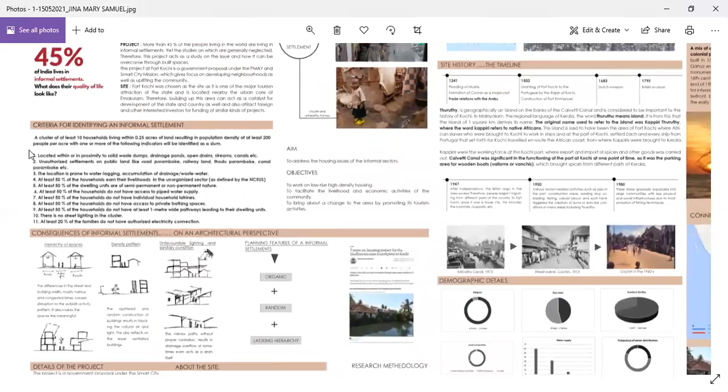The criteria for selecting informal settlements are as listed below. The consequences of informal settlements from an architectural perspective are the lack of hierarchy of spaces, the congested density pattern, and the unfavorable lighting and sanitary conditions.

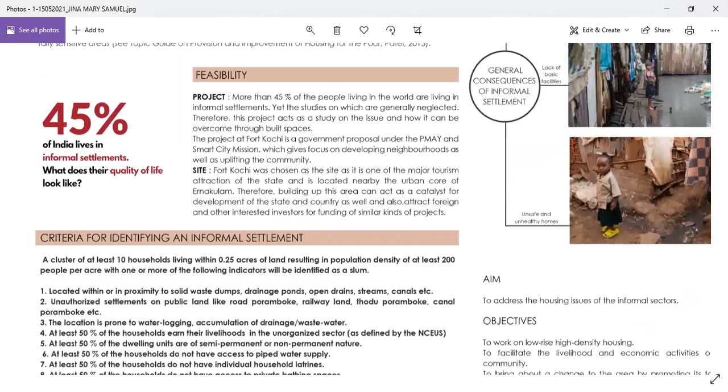So why this project? I chose this project because more than 45% of the people living in the world are based on informal settlements. Therefore, this project acts as a study on the issue and how it can be tackled or overcome through built spaces.

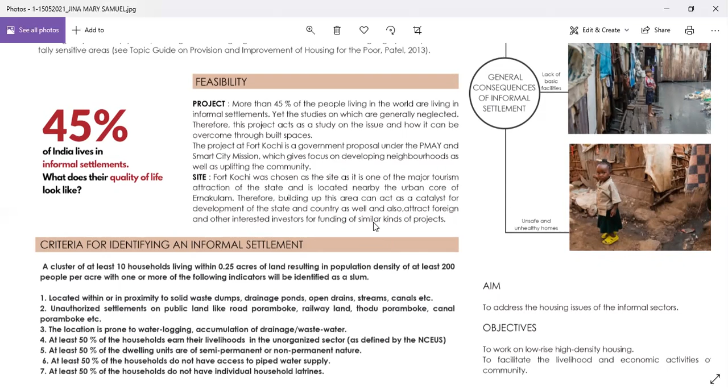The site is Thuruthy, located at Fort Kochi. This site was chosen because it is one of the major tourism attractions of the state and country, and is located near the urban core of Ernakulam. Therefore, building up this area can act as a catalyst for development of the state and country, and also attract foreign and other civil investors interested in funding similar kinds of projects in the near future.

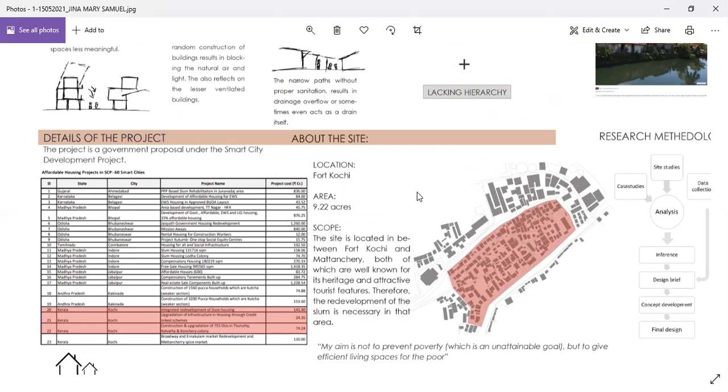This project is a government proposal under the Smart City Mission and PMAY. It has an area of 9.22 acres, and the history of the site dates back to 1341 AD.

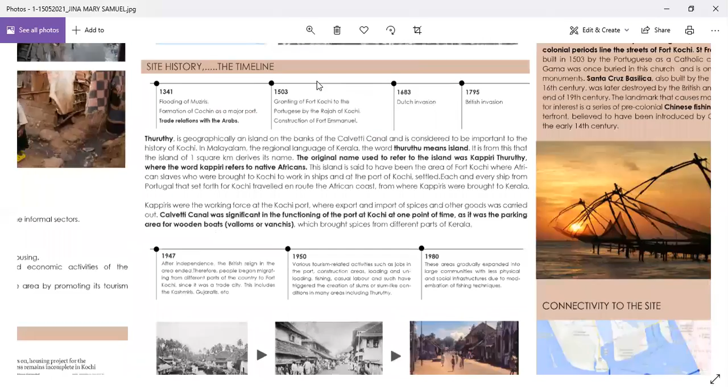The connectivity of the site is such that it can be accessed through roadways and waterways. The demographic details of the site were deducted from the site survey, questionnaires, interviews, and physical documentation conducted at the site from January till late February.

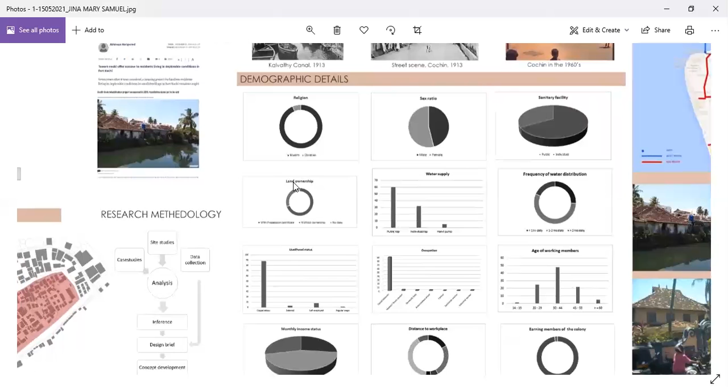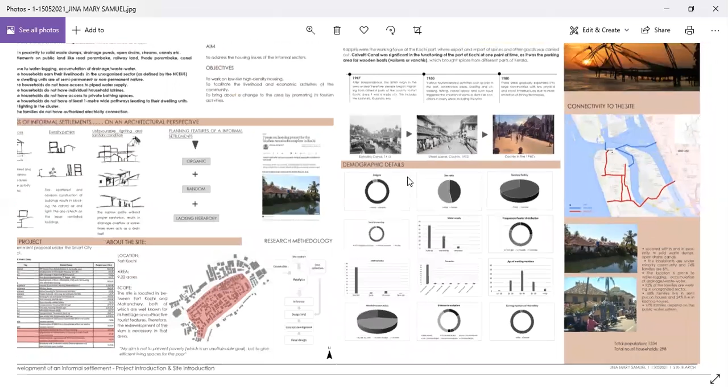From what I have studied and analyzed, most of the people belong to the Muslim community, and they work in the unorganized sector or as casual laborers. The sanitary condition in the area is very poor, and it has an equal ratio of males and females. The total population of the area is 1,300, and the total number of households is 298.

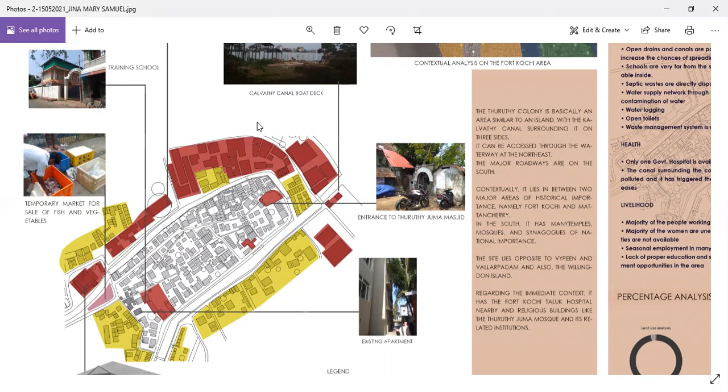When it comes to the context, the site is surrounded at the entrance by a community hall and an existing temporary market, and also a higher secondary school. Then there's a boating area, and within the site at the north there's a mosque known as Thuruthy Juma Masjid, and a training school at the east for 11th and 12th standard students, which functions very little. There is also an existing apartment built by a social group.

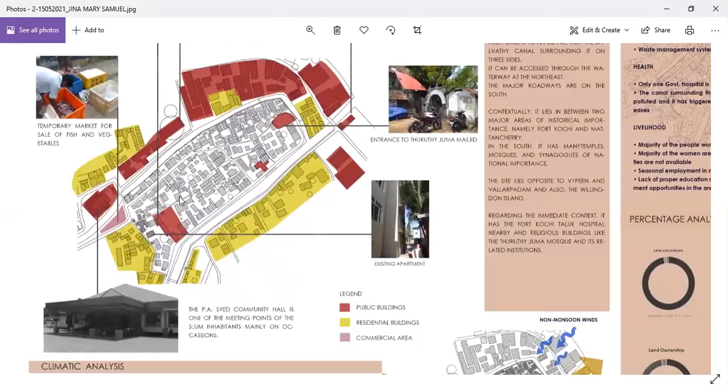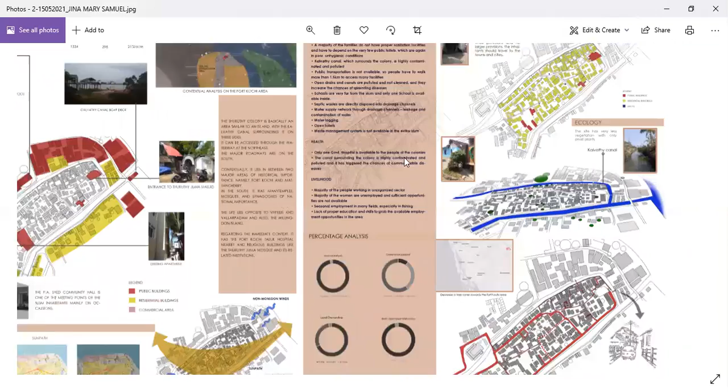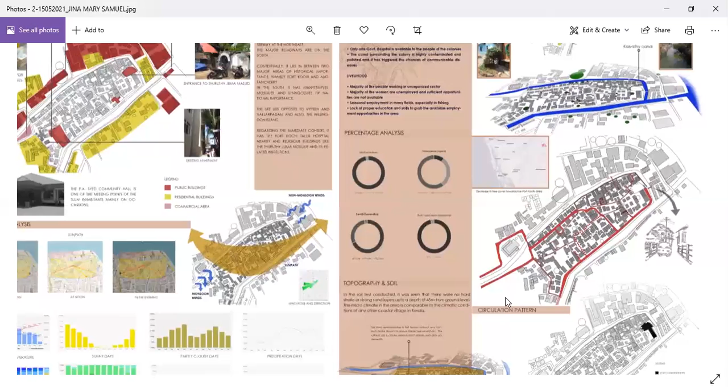The weather of the area is very hot with strong winds. The various mappings that I have deducted from the studies are as these. The ecology of the area shows very less vegetation, and the circulation is also very poor with lesser access ways to individual houses. The topography of the land is flat.

Also, the roofing types and the lighting and ventilation are poor, and the roofing is mainly tile roofs, which recently changed to flat roofs.

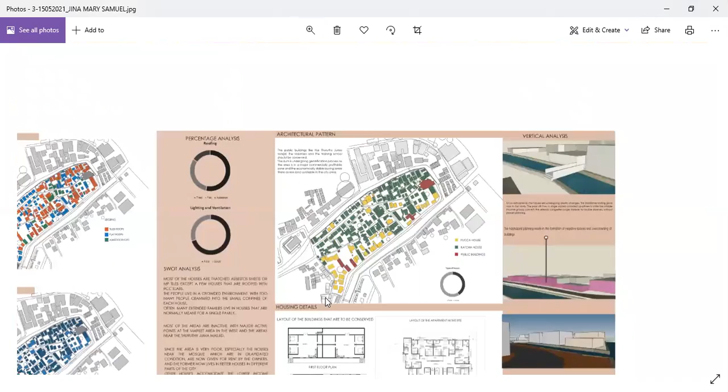At the entrance there is more activity, and further away from the entrance it is a very silent place. Also, the housing in these areas, most of them are kacha houses, and the structure has efflorescence due to the salinity of the water, since it is located in the backwaters and near the Arabian Sea.

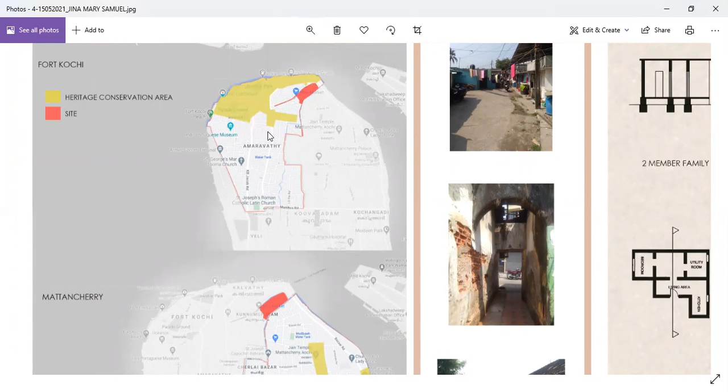Also, the site is sandwiched between two heritage conservation areas, one at Fort Kochi and the other at the Mattancherry area.

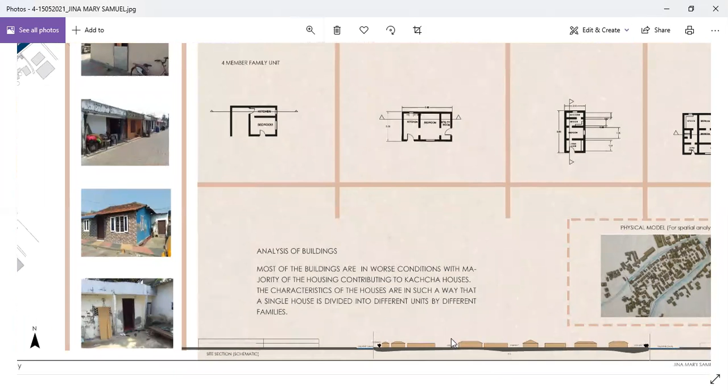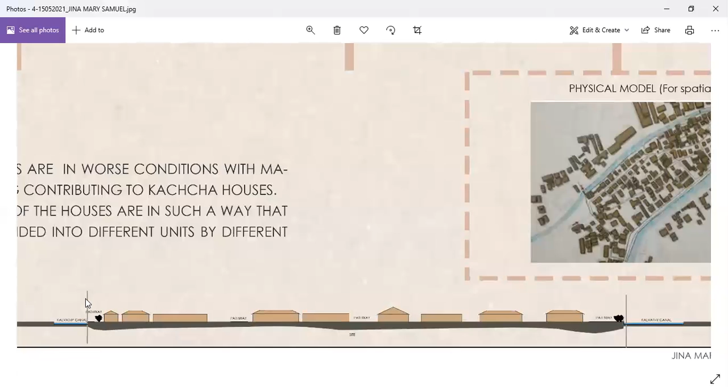Also, the houses basically have a rectangular or square layout with basic utilities like living area and kitchen, and some of them don't even have a toilet, having to walk almost 1 to 2 kilometers to access them. Most of the buildings are divided and used by different families — a single house is divided among different families and used. The site is surrounded on either side and at the north by the Kalvathy Canal.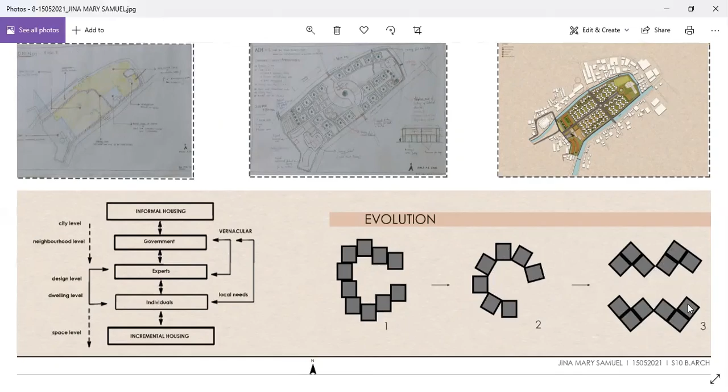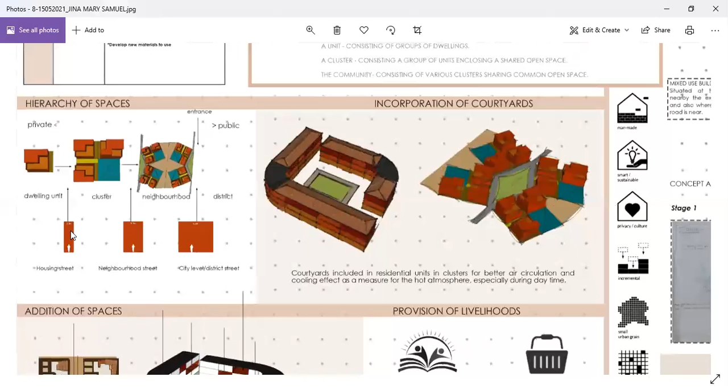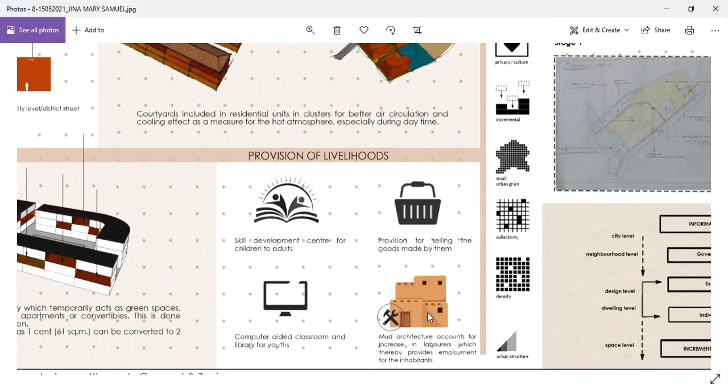There was incorporation of courtyards for cooling effect and the addition of spaces which can also be converted. The provision of livelihoods includes a skill development center, a computer-aided classroom, and mud architecture for labor, along with provision for selling goods made by them in the sieving and food processing unit.

This is the master plan. At the entrance from the bridge, there's a parking area, and nearby is apartment number 1. Further east is apartment number 2. At the entrance itself is a small commercial or mixed-use building, and there is the primary school.

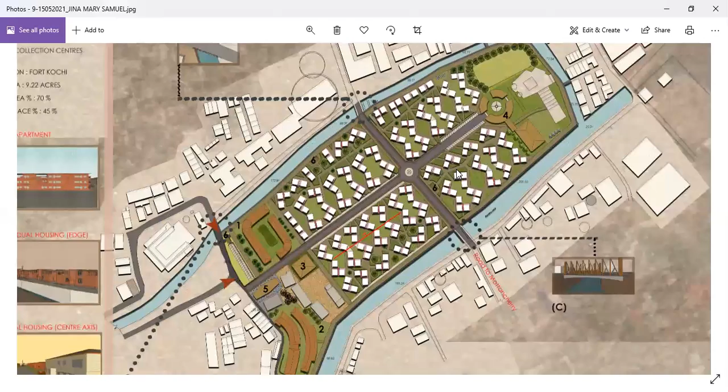The individual housing units were provided with adequate open spaces at the center, and a community center was provided within the major axis without hindering the view of the mosque.

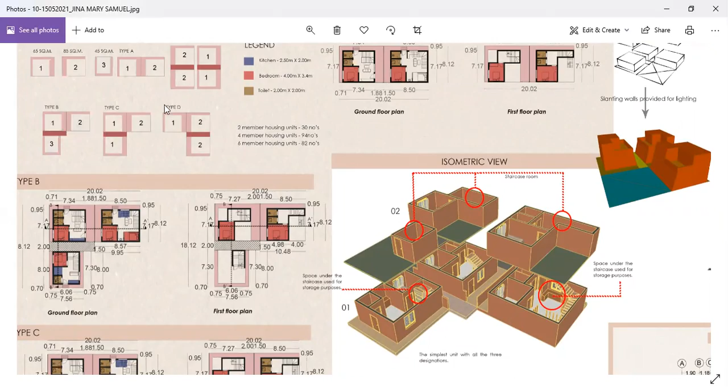The individual units are clustered with designations 1, 2, and 3: 1 for 65 square meters for a 4-member family, 2 for a 6-member family, and 3 for a 2-member family. These were shaped into groups of 3 and placed according to the site and context. For waste management, a septic tank was provided for 150 people in each cluster.

The necessary materials were also added to the buildings.

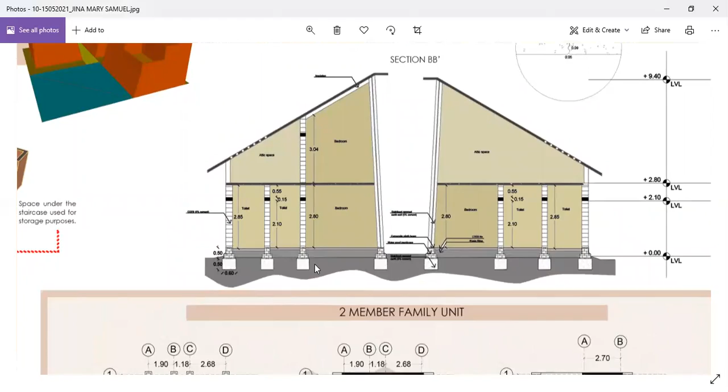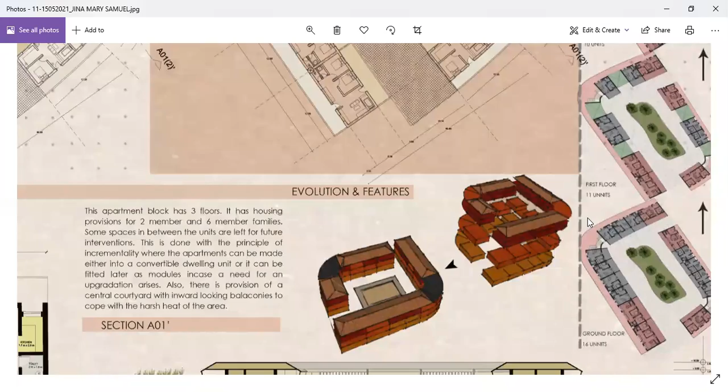Apartment number 1 has 6-member units and 2-member units. At the ground floor, there are 16 units. At the first floor, which is the base floor for converting, there are 11 units, and the second floor has 10 units.

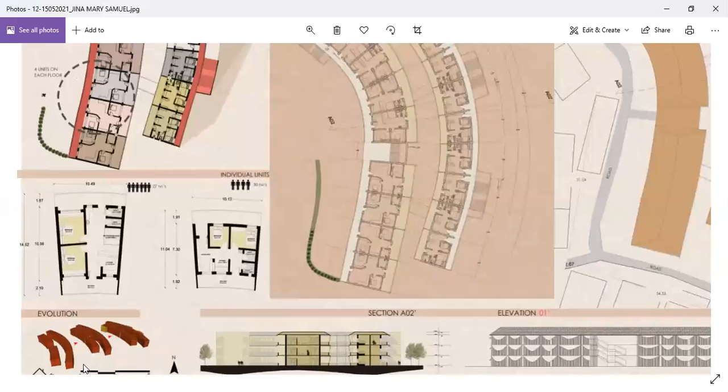Apartment number 2 was shaped in this way, considering the site land area available, and it has 6-member units and 4-member units, joined from 3 separate buildings.

The primary school has classrooms from KG to 4th standard, and the mixed-use building has migrant housing at the top, shops at the first floor, and parking at the ground floor. The community development center has skill developing facilities.

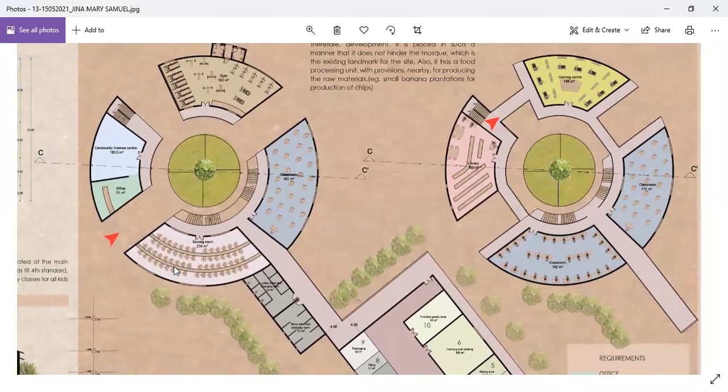This includes things like a sieving room and livelihood development facilities, such as a sewing room and food processing unit, which is connected by a corridor way, with changing rooms in between.

At the entrance, there is the office and the community science center, and from there the library and the gaming center can be accessed.

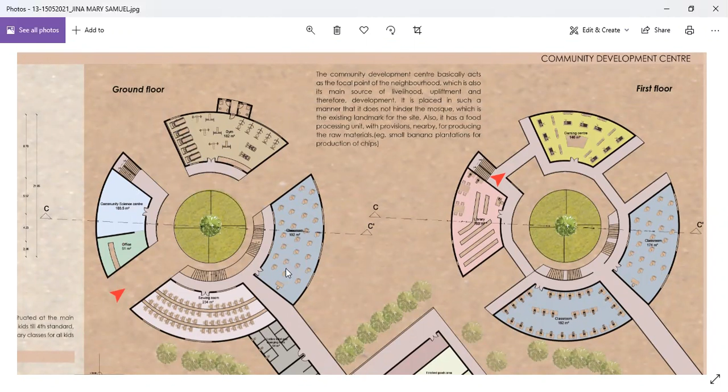At the ground floor, there's a gym located near an open space, and also classrooms for computer-based learning and skill development classrooms are placed.

The solid waste management was placed in such a way that from the collection units, the waste can be transferred to the central plant at Mundamveli.

Then the special topic is the material palette itself.

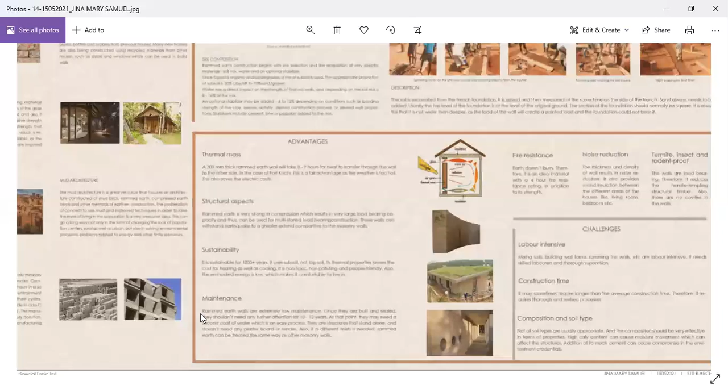At first, the low-cost building materials were listed, and from that, mud architecture was chosen because of its advantages like thermal mass, structural aspects like high load-bearing capacity, sustainability, maintenance, fire resistance, noise reduction, etc. It also provides labor for the inhabitants.

Also, the technical aspects like the stabilization of walls, the joints, and internal reinforcement were studied. For this project, instead of bamboo and wood, steel reinforcement is used because of its more stabilized nature and durability.

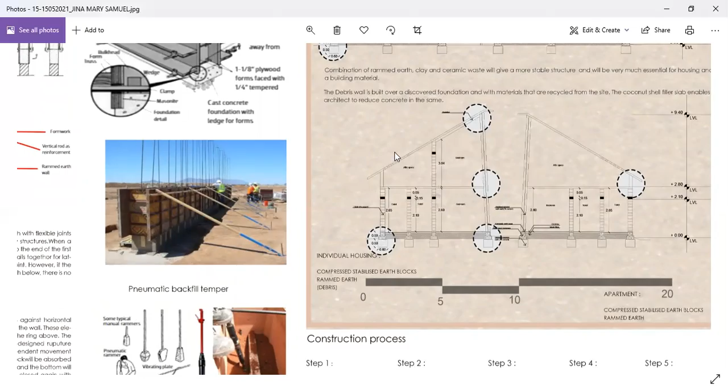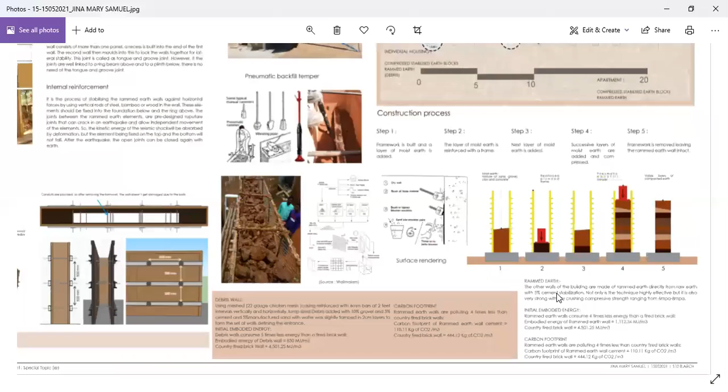Then we have the sustainable advantages of these walls, the carbon footprint, etc., which were studied.